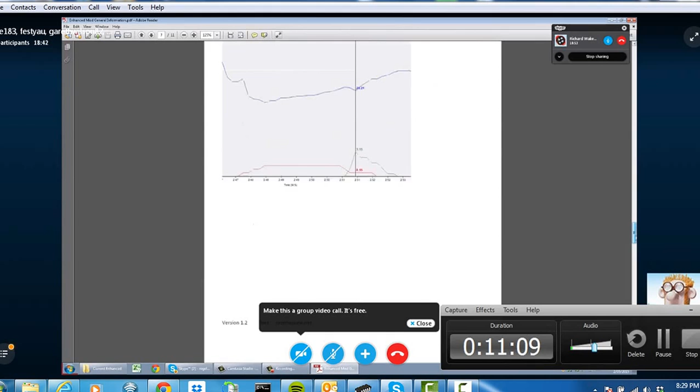Wideband versus AFR, I think we all know that, so it just calculates the difference. So you can log that out to a history table as well, and then you can use that in an Excel spreadsheet, or directly in your injector multiplier table, to adjust your fueling straight from your wideband and your target air to fuel.

So does everyone know that your air to fuel ratio target in your data log is what you set it to in your power enrichment table? Mm-hmm, yep.

End of injection, that's a fairly big area. I can show you what I've worked out so far with the Excel spreadsheet. I don't know if anyone's downloaded the new one in the enhanced mod forum.

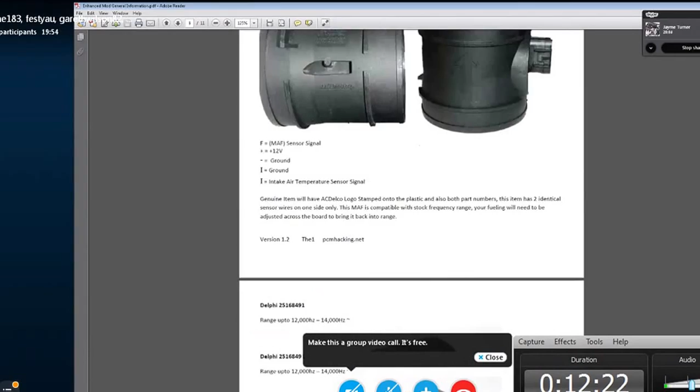And all the different MAFs, just basically what I've tested and what sort of frequency range you can expect to get out of them, what the part numbers are, what the wiring is for them.

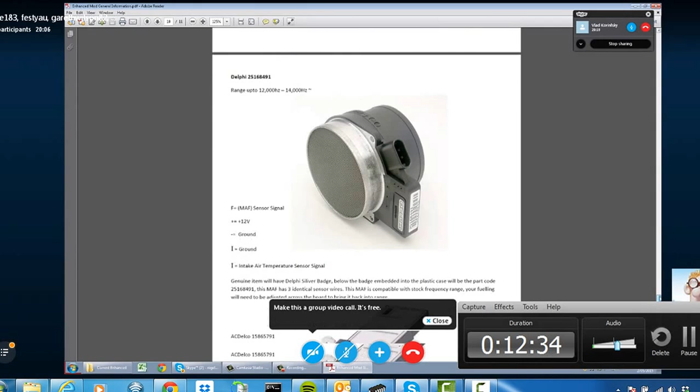And I guess I won't get on the topic of MAF versus MAP, but I think we can all agree that MAP has its place and MAF can have its place as well. There's certain things that MAF can't read, or certain conditions that MAF can't read, but MAP can.

Can I have an example on that? Because that's something that I'm struggling with. I see a MAF as an intake restriction, not something that can control the engine better. So I guess you'd have to define what both of them are and what they read first.

So the MAFs are a hot wire sensor. Basically it's like a temperature, a hot wire, and when the temperature goes up or down, then it will fluctuate the frequency output as well. So you can have atmospheric conditions, just like humid or not humid.

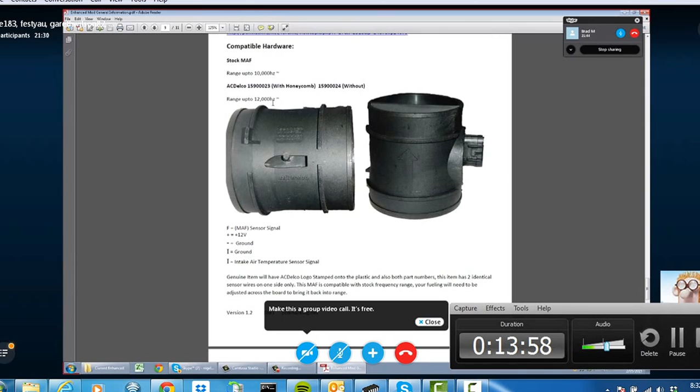Altitude and how dense the air is just passing over the wire will cool it at a different rate. That will affect the frequency versus MAP, which... the altitude can have an effect, and that's why you've got your altitude offset tables for MAP, but you're just monitoring pressure basically.

So I guess that's why the OEMs have all gone to MAF now, because you can get more on-the-fly adjustment. They also adapt to small changes with the engine a lot better than MAP does.

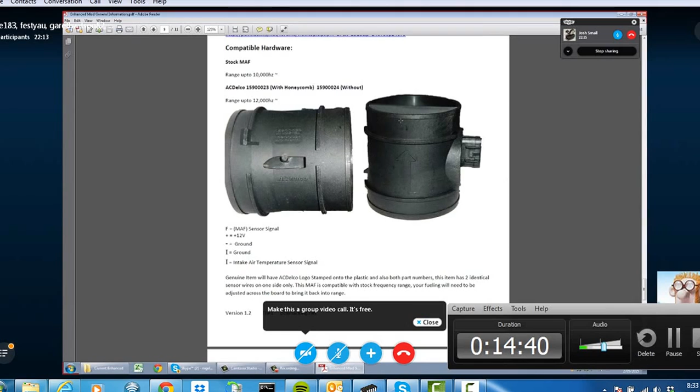I mean, you've got to look at the whole picture and help map it out so everyone can see it, and I'll do that in a moment. But the MAF is like a third adjustment, so you've got other things that adjust the fuel as well.

So would you say that the main benefit of a MAF is improvement of drivability and efficiency rather than out-and-out performance?

Well, to an OEM, it can tolerate conditions better than a MAP system would. GM can go and sell a Commodore in the middle of the desert, and sell a Commodore to someone in a rainforest, and both of them will have enough leeway in that, and the MAF can pick up the air density and the humidity and everything and change the fueling enough to cover it. Yeah, can I say one thing about MAP versus MAF?

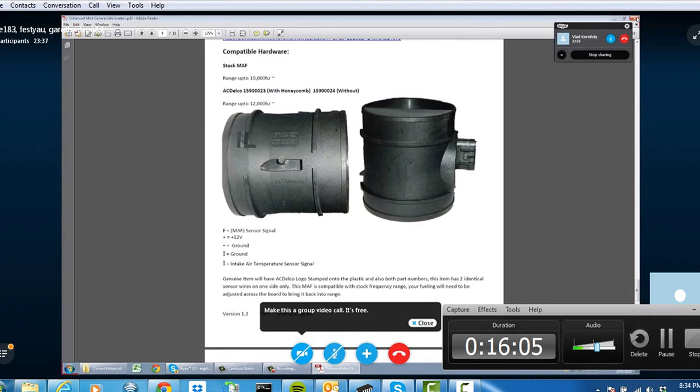The MAF actually measures the direct quantity of air going into the engine, like the mass of the air, so it's able to adjust for altitude, temperature, humidity and all that sort of stuff. It's directly feeding information into the ECU about how much air is going in, whereas the MAP system works on kind of like it measures pressure in the manifold, and then from there it actually calculates.

The ECU will calculate from its code how much air will be going in based on assumptions like the ideal gas law or something like that. Yeah, that's pretty much it.

As I found, even small changes on a MAP-based system need retuning, whereas on a MAF you could put on rockers or even a good exhaust or something, and usually the MAF-based system will actually accommodate for that. When you do minor porting or anything like that, you don't have to adjust the VE table because the MAF is telling you exactly how much air is going in, whereas with a MAP it relies on the VE table and the MAP sensor to get that same information.

Yeah, that's right. I just took the bell mouth out of my VR and tuned it today, and I did actually find there were differences. Not huge, but they did affect the overall air-fuel ratios that were reading at certain points of the map. That's just a minor thing, and it changed it quite a bit. So that's how I sort of reference the MAF - it's another item that can monitor conditions and change the fueling.

Sorry, can I butt in for a sec? I'm just after everyone's thoughts - it's a popular modification to do a MAFless tune on an LS1, let's say, but in the States that's not popular. It's to tune the MAF. Why would that be? Obviously you've pointed out the benefits of the MAF now, but why in Australia do people throw it over the shoulder? Can I answer that, because I know a bit about that.

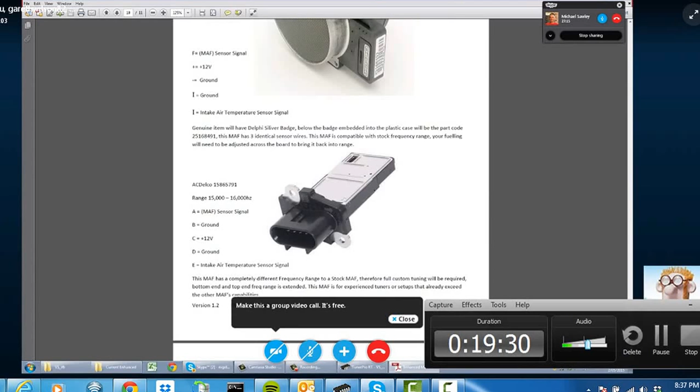The main point is ease. There is no outright power benefit to it, but it's so much easier for a lot of tuners to throw the MAF in the bin and just tune the VE table like they used to, and that's why they all do it. Whereas if you put a MAF on, you've either got to find a pre-calibrated MAF table or do it yourself, and a lot of them are so used to doing MAFless that they just keep doing it, even though it may not necessarily be better. The only benefits you get in keeping a MAF are drivability and economy, but your outright power is going to be no different at all.

I'd love to have a lesson in MAF changes, MAF scaling and all that sort of stuff. I've got absolutely no idea with that. Yeah, well, I'm in the same boat, really.

Just going to show you here the three tables. Everyone's got the base injector rate, and you'd have that on all the map stuff as well. Then on these ones you've got your injector multiplier table - it's pretty much like it could be a VE table or anything. Then we've got a MAF on top, so it's reading when the airflow changes at what frequency they're on the table. By the time you modify your engine at 2700 hertz, you're probably not flowing 7 grams per second of airflow, but it's just a value, really. You can recalibrate it.

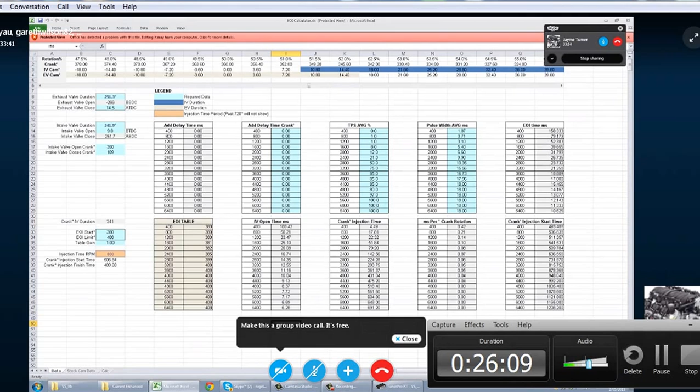Whereas if you make your end of injection later, then by the time the exhaust valve is already closed, your injector fires, and all your fuel stays in your cylinder. That's the whole point of buggering with this at all.

Yep. And the other point too is hot versus cold. Cold start can be a big pain in the butt as well. Obviously there's minimal point to injecting on the back of a valve when it's cold, because it won't be hot anyway, and you'll just end up pooling fuel.

So you're probably better off injecting it closer. Say the factory does it at 408, you might be better off doing it at 380 at idle when it's cold for the first couple of seconds. That'll help it out a lot as well. So you'd obviously tune this throughout the rev range, not just for idle quality.

Yep, so in enhanced mod, when you go in there - I'll disguise all of these - there's a cold and a normal table that I put in. They're RPM based, and there's a scaler there, so you can set at what coolant temp it switches over from the cold to the normal.

So what you've got to remember though is your injector. Say you get up to 80% duty cycle, that means for inlet opening, inlet closing, exhaust opening - you're all the way open during that entire event anyway. So when it fires, it becomes a lot less important at high load because it's always open anyway.

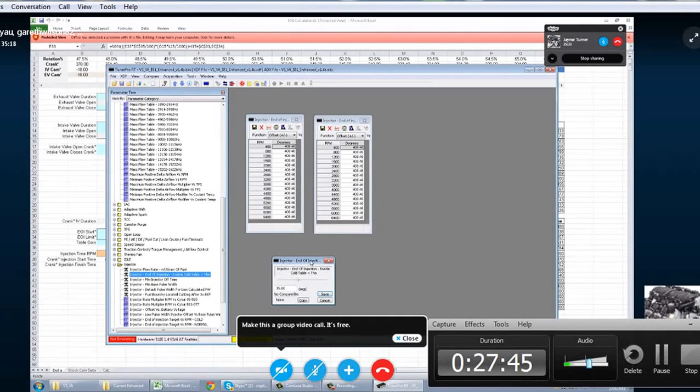Yeah, yep. The valve overlap at idle is a good point though. I hadn't thought about that.

And that was explained in the video - the way you get it really good at idle is you run it in real time and you alter the end of injection and you look on your wideband, because more fuel is staying in the cylinder, more fuel is burning, and it alters the reading on your wideband.

I was actually going to ask that - which way does it affect it? I forget. From what I've seen, if you've got raw fuel going into your exhaust, it says it's lean.

Yeah, you're right. It'll read lean, and it will richen up. It will read richer as you get closer to your ideal end of injection event, because the oxygen's being consumed, obviously, when it's burning, rather than just being like in a vapor form in the exhaust. So does that kind of make sense?

Yep, yeah, that's what I think. And then you've still got it on the other end, on your intake end as well. If the injection timing - depending on your valve timing to when the end of injection is, whether it's going to help atomise the fuel or not, or pool it - more fuel on your port walls doesn't help.

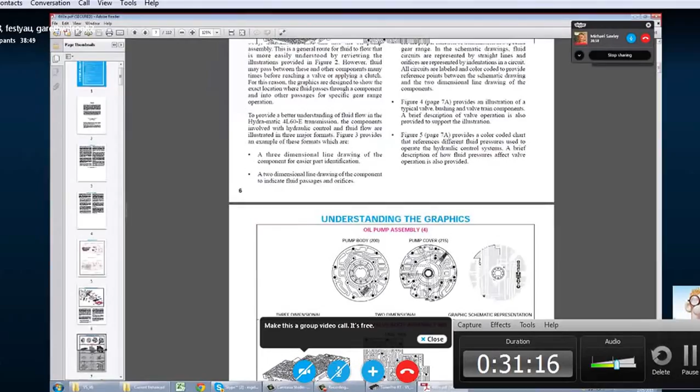So, 4-speed electronic. The best thing, if you don't get any of it, some late night reading would be this 4L60E manual. It's the GM manual, pretty much everywhere on the internet. You can download it, there's a few links in the forum too. It takes you through the whole thing from start to finish - how it works, what all the components are, the pump, where the oil flows, even how it changes gear.

Did your brain hurt when you looked through all the oil flow diagrams? Well, I've had a few transmissions with some problems, and I've had to nut through them before, so yeah, it does.

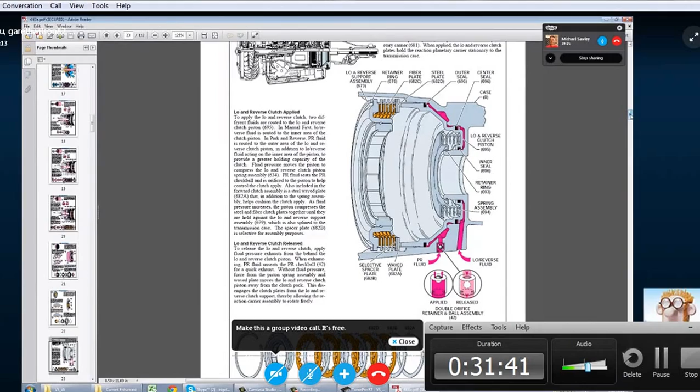My head hurts bad enough when I look at the T5. I can't imagine building one of these.

Yeah, well, that's where it all starts. It's your pump there, so it feeds fluid. Probably the easiest explanation is your pump makes high pressure. When it gets to the valve body, it goes to lower pressure, and you'll see the 0 to 90 PSI mentioned in all the tables and things you can change in the tune. The 0 to 90 is basically in your valve body.

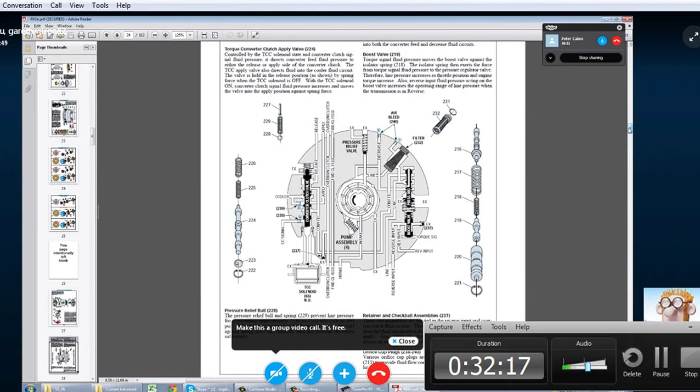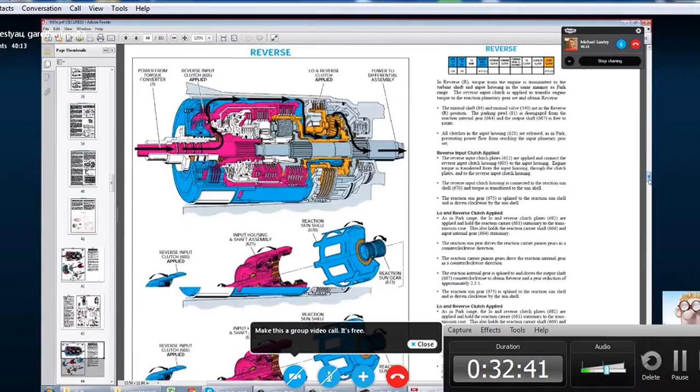Things to shift your components. This manual is what you can pick up if you want to see what's inside and how things connect, which clutch packs are what. It runs through everything from park, every single gear, what happens, gives you a full list of what's applied in what order. So it's the go-to manual.

So, crux of it, I won't go through that. So you've got your gear shifting there. There's cold and hot stuff as well, which is set on fluid temperature, obviously.

I guess gear shifting and how to tune it would be one question. Some other people might have a better idea of this, but from looking at code and testing stuff, this is my best overall thought of it. Let me find the other tables - ramp delay and pressure delta. You kind of nearly need a diagram to show the process of it all.

You've got all these other tables, like spark - you've got base spark, intake offset, coolant offset - all these things that offset each other. I wonder if I can do... that's your base table there. You really need a data log too. I wonder if I've got a data log somewhere, that'd be the best way to show it.

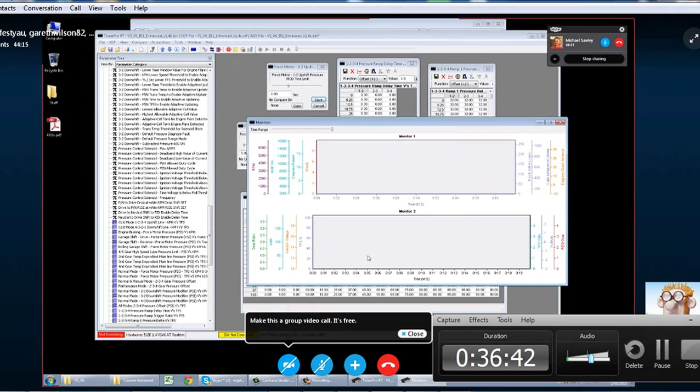The items to log would be gear ratio, because you can see requested gear and gear ratio - you'll be able to see it request gear ratio changes. You'll see the clutch slip go up, and based on the whole time period, if it's at full throttle, an acceptable time period on a normal transmission would be a 1 second shift. But if you're getting, say, a 2 second shift, then you're obviously getting up near this limit.

Then you need to look at ramp pressures. Do I need to change the delay time? Do I need to get in earlier or later? If you've got a high performance transmission, it's obviously going to shift quicker. You don't want your ramp pressure going later, because then you might just bind something up.

Depending on what gear it is, so if you're going into fourth gear, you've got the bands locking up. That's where the diagram comes in handy to see what's happening in each gear, so you can work out the whole event, what needs to happen, and what you need to change to stop bad stuff from happening.

Hopefully that's a point in the right direction. So all the shitbox Commodores that I've ever had come into the workshop with a shift-kitted or modified auto that thump and bang...

Can I step in there a little bit? A lot of people don't really know this, but on a 4L60E there's a little hex nut that manually alters the overall pressure in the box. What that's actually for is, from factory they use that to calibrate - when the ECU is commanding 90, they calibrate it so it's actually 90 in the box, for example. Then an auto shop can go, the pressure's a bit low in this box, so independently of the calibration they might screw another 10 psi onto that screw. So when the ECU thinks it's only 90, it's really 100 now. And that's when you screw it around probably half a turn, and you'll start getting it thumping into D all the time. That's sort of what a lot of the problems are.

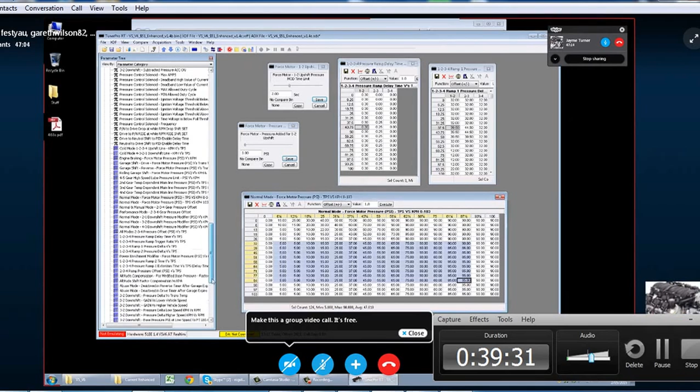The other thing too that I've found is when you get the hard shifts, they've drilled the valve body plate. You have little holes in your valve body plate for 1 to 2 shift, 3 to 4, 2 to 3, and TCC lockup.

There's also another mod on the TCC valve in the valve body where there's a little spring, and they put a big spring in so that basically there's no PWM, it just locks up. So you'll come up to the point where the torque converter's going to lock up on the highway, and it'll just go from 0 to 100 and bang straight in. They do that for various reasons because the PWM does wear out the bore in the valve body, so they put the spring in there so it just doesn't operate. So your TCC's either on or off, like in some of the older transmissions.

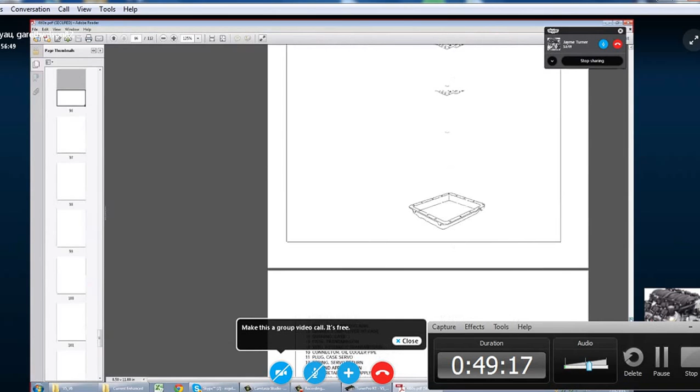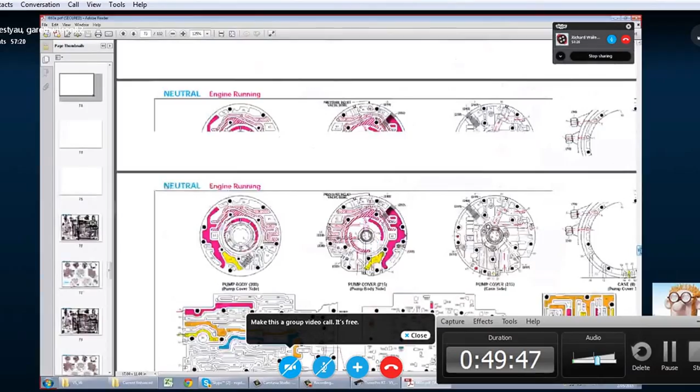It is in this document - there's all your valve body, what all the valves do. If anybody can't find it and wants a copy, just let me know. It's in here somewhere. If you've got a problem, check that pressure and compare it against the GM table in here. Obviously if you've got a piston leaking in a clutch pack, that's going to show up on the pressure gauge when the pump's got no pressure or something like that. So it is one indication for sure.

Cool, so anyone else got any other questions about that one? Yeah, do we need a PhD for this?

Yes, well, we're trying to do stuff that transmission guys - I think from one guy I talked to, there were 5 guys whose full-time job was just doing transmission calibration. They had all sorts of stuff hooked up to transmissions over there, driving it out at the test fields at minus 20 with the head out the window doing data logging just to get a reading down sub-zero, then running out in the desert to get top level stuff, and then putting it in one of those test rooms with the heaters and freezers in them as well to do precise temperature control. I'm sure they had plenty of tricks in the book to do stuff. And I guess sometimes it comes down to money too, and what top level people you've got pressing you to get this product out.

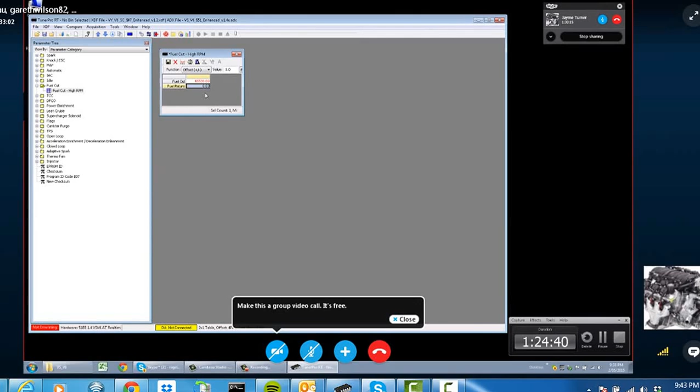Yeah, I'll be able to test that soon, I'm a couple of weeks away from getting my 10,000 RPM motorbike engine running on 808. I was seriously considering converting my bike over to an 808 until I realised that the rev limit wouldn't cut it. Oh, jeez.